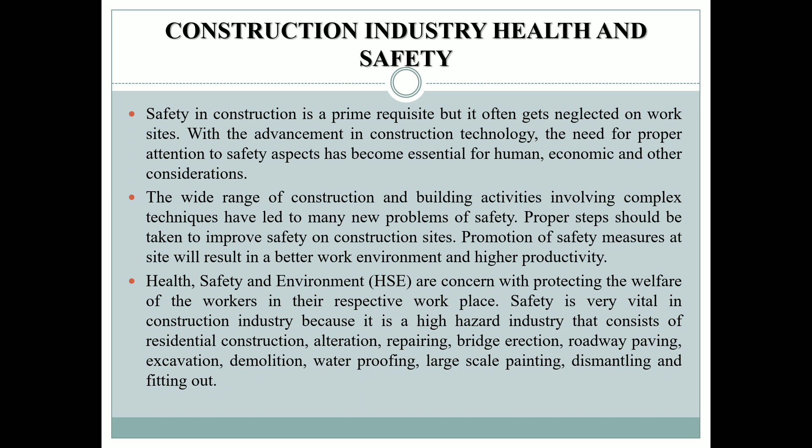Health, safety and environment, that is HSE, are concerned with protecting the welfare of the workers in their respective workplace. Safety is very vital in construction industry because it is a high hazard industry that consists of residential construction, alterations, repairing, bridge erection, roadway paving, excavation, demolition, waterproofing, large scale painting, dismantling and fitting out. So health, safety and environment should also be very important in construction industry.

The main force behind any construction site is the manpower, as usual. Without safety, the risks and hazards at very dangerous places can get people injured, hurt, or even killed. This can cause construction site delays, extra expenditures, and loss of manpower. Health and safety is one of the tools that ensures a company achieves success. They cannot get a good outcome if their employees are getting sick and hurt all the time. So protection against health and safety is the prime right of laborers.

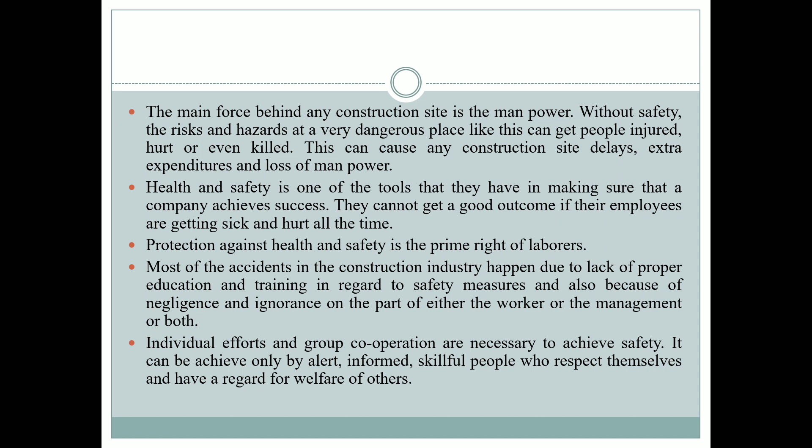Most of the accidents in the construction industry happen due to lack of proper education and training in regard to safety measures, and also because of negligence and ignorance on the part of either the worker or the management or both. Individual efforts and group cooperation are necessary to achieve the safety. It can be achieved only by alert, informed, skillful people who respect themselves and have regard for the welfare of others.

So what are the objectives of safety management? To help increase speed in construction, to increase the standard of living, to reduce the cost of construction, to conserve the available labor force by minimizing idle time, to reduce human suffering.

So, what's actually safety in planning and design? Why is it important? Plan the works to meet the complete requirements. Design the structure considering all the loads and to meet the global requirements or codal requirements and procedure, and use standard materials.

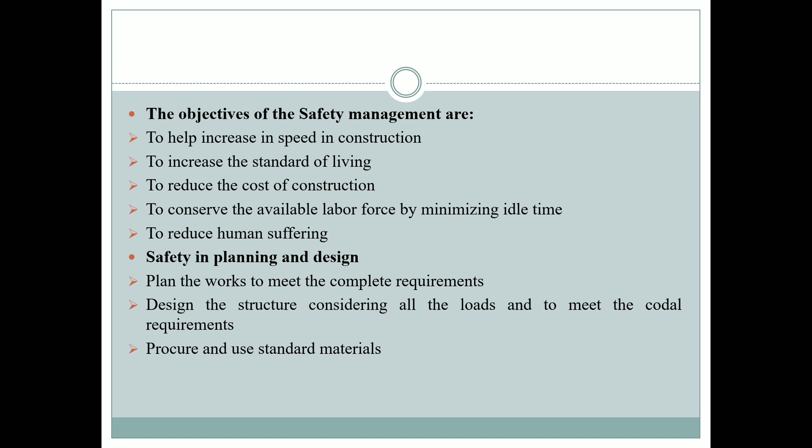So, health and safety issues for construction workers. Which are all the different health and safety issues that workers generally get on the construction site?

First one is pain or injury from overexertion and repetitive manual tasks or working in uncooperative postures, exposure to molds, fungi or rodent droppings, exposure to paints, lead, wood dust and toxic chemical solutions, working in extreme conditions like high temperatures and chemical solutions, working with hand tools, powered tools and heavy machinery equipment, excessive vibration of hands, arms or body from powered tools or equipment, extension of work days, stress or shift hours, and during night working in low light or very poor visibility.

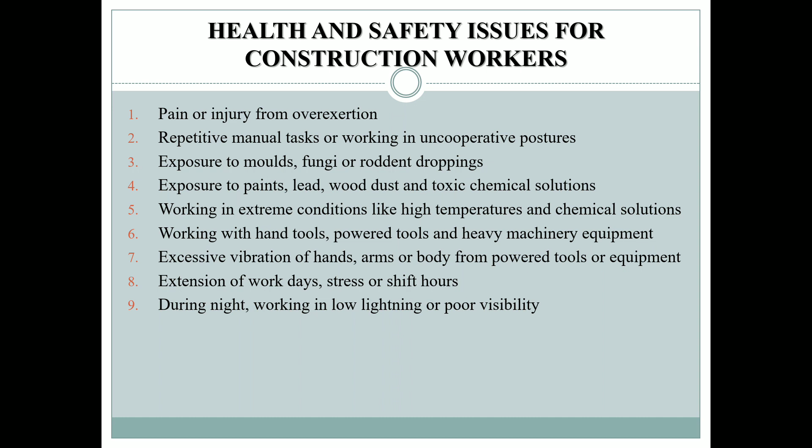These are all the general health and safety issues that a worker on the site will get. So, which are all the safety precautions to prevent accidents? The support provided at the higher levels over which the workers move in connection with the work should be strong and stable.

It comes under scaffolding and all. For workers moving at higher levels, the support should have higher protections to prevent the workers from falling due to slipping. No worker should be allowed to carry or lift any heavy load which can cause serious injury. Before dismantling the building, all unsafe parts should be properly protected to prevent any accidents to the workers. No unskilled person should be engaged on jobs such as operation of heavy equipment like bulldozers and cranes, etc.

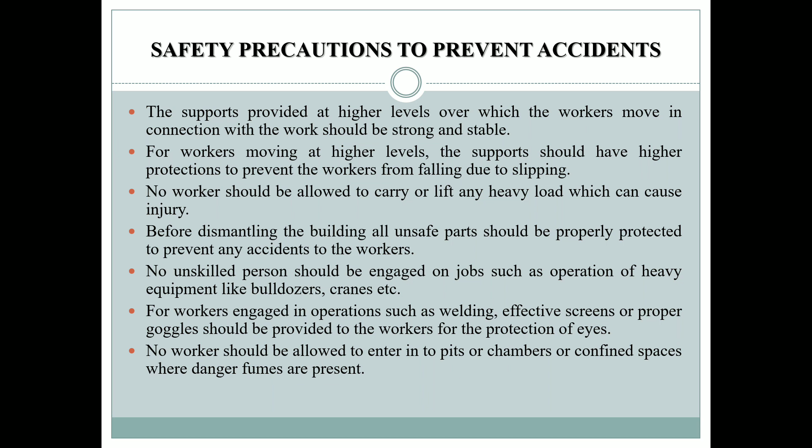For workers engaged in operations such as welding, effective screens or proper goggles should be provided to the workers for the protection of eyes. No worker should be allowed to enter into pits or chambers or confined spaces where dangerous fumes are present. Safety training is provided for all the workers, and disciplinary actions may be taken when the above methods are not effective.

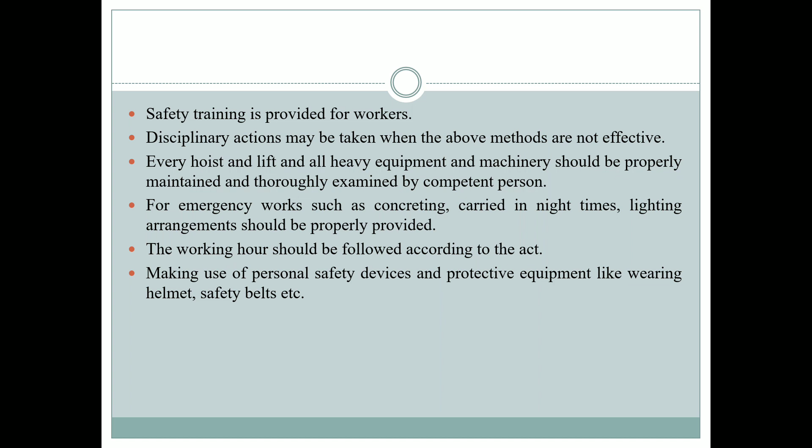Every hoist and lift and all heavy equipment and machinery should be properly maintained and thoroughly examined by a competent person before using it. For emergency work such as concreting carried out at night, lighting arrangements should be properly provided. The working hours should be followed according to the Act. Making use of personal safety devices and protective equipment like wearing helmets, safety belts, etc.

So, how actually is health and safety measures in construction?

First is site layout and planning. A badly planned site is the underlying cause of many accidents, resulting from falls of material and collision between workers and plant or equipment. Space constraints, particularly in urban sites, are always the biggest limiting factors. Proper planning by management is an essential part of preparation and budgeting for the safe and efficient running of a construction operation.

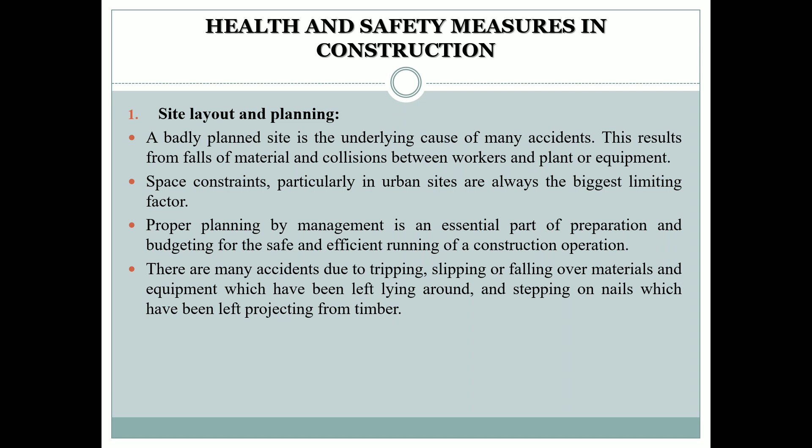There are many accidents due to tripping, slipping, falling over materials and equipment left lying around, and stepping on nails left projecting from timbers. So site layout and planning, and personal protective equipment, PPE, have to be implemented on construction sites.

It refers to protective clothing, helmets, goggles, and other garments or equipment designed to protect the wearer's body from injury by blunt impacts, electrical hazards, heat, chemical infections, etc.

The required PPEs for construction workers include head protection, that is safety helmets; foot protection, that is safety footwear or gumboots; wearing apparel, high visibility clothing, waistcoat, jacket, aprons, etc.; personal fall protection, that is rope grab and fall arrestor; and eye and face protection, goggles, welder's glasses, and hand protection by gloves, finger cots, etc.

Next, respiratory protection like nose masks and ear muffs, etc.

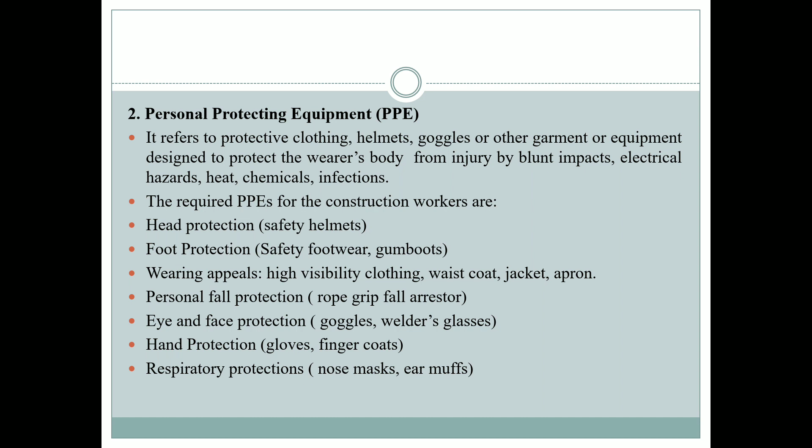The third one is first aid kits and accident reporting. First aid and rescue equipment should always be available on the construction site. On large sites where more than 200 people are employed, there should be a properly equipped first aid room, and at least one person on every shift should be trained in first aid to a nationally recognized standard.

In day-to-day work, an accident register book should be kept at the site to record the accidents that occurred in detail.

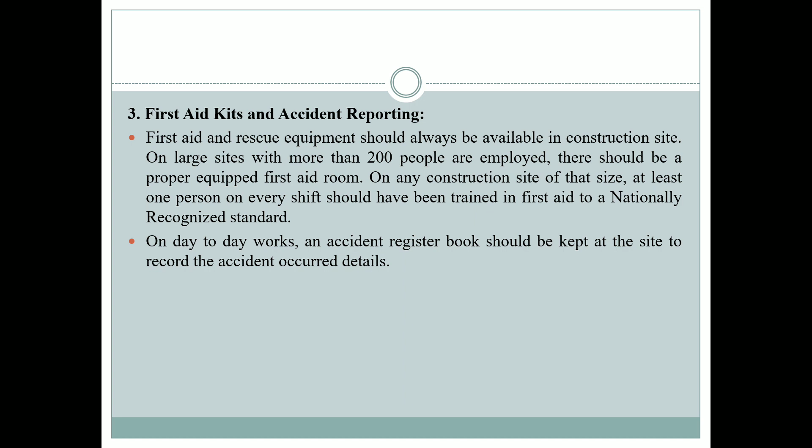The fourth one is health and safety warning signs, that is signboards which have to be included on construction sites. Safety signs and signals are one of the main means of communicating health and safety information. This includes the use of illuminated signs, hand and acoustic signals, spoken communication, and the marking of pipework containing dangerous substances. Traditional signboards such as prohibition and warning signs, fire exit signs, fire action plan notices, firefighting equipment, etc. are to be used on site.

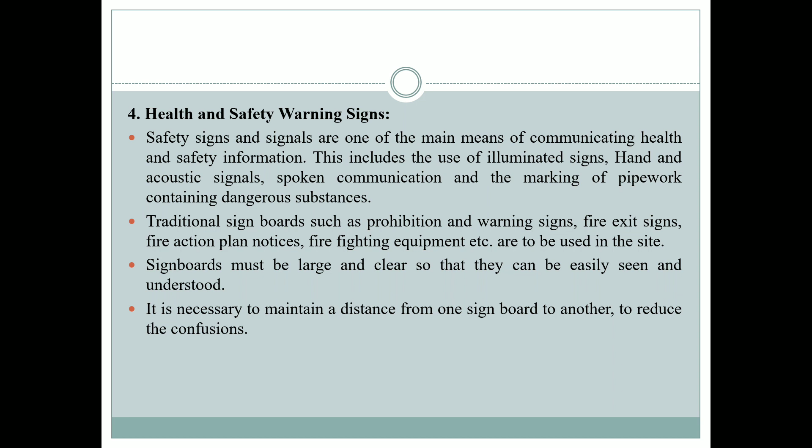Signboards must be large and clear so that they can be easily seen and understood. It is necessary to maintain a proper distance from one signboard to another to avoid confusion.

Next, safety policy. Site managers should have a written safety policy for their enterprise, setting out the safety and health standards which are their objective to achieve. The policy should name the senior executive who is responsible for seeing that the standards are achieved and who has authority to allocate responsibilities to management and supervisors at all levels and to see that they are carried out. So safety policies have to be maintained.

The sixth one is health and safety training on construction sites. With regard to occupational safety and health, training consists of instruction in hazard recognition and its control measures, learning safe work practices and proper use of personal protective equipment, and acquiring knowledge of emergency procedures and preventive actions.

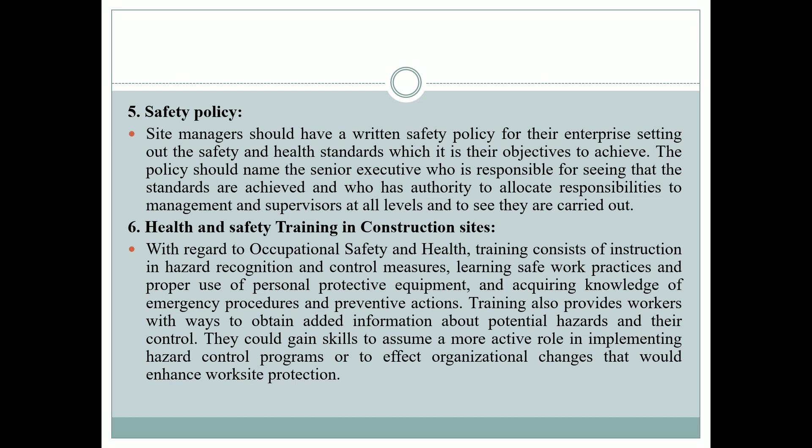Training also provides workers with ways to obtain added information about potential hazards and their control. They could gain skills to assume a more active role in implementing hazard control programs or to effect organizational changes that would enhance worksite protection.

Next is adoption of safety measures for different construction activities. Some of the different construction activities are listed, along with what different precautions are to be taken for the safety and health of the worker on the construction site.

First of all, we'll begin with excavation. In all works, an experienced and competent foreman or supervisor should look after the excavation work. He should have authority to enforce safety rules and prevent the use of defective or unsafe appliances. Before doing excavation work, complete knowledge of underground structures should be essential.

Safety helmets should be worn by persons entering a trench where hazards from falling stones, timbers or other material exist. Whenever workmen have to excavate trenches in soil that is soft or fissured rock or hard soil exceeding 2 meter depth, the trenches should be properly shored and timbered.

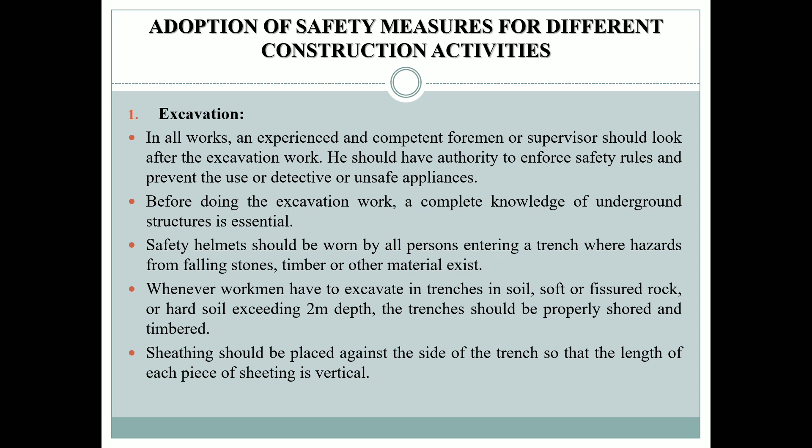Sheathing would be placed against the side of the trench so that the length of each piece of sheeting is vertical.

Excavated material should be kept away from the edge of the trench in order to provide a clear berm, width not less than one-third the final depth of the excavation. However, in special cases where disposal area is limited, the minimum berm width should not be less than 1 meter.

So what are the different precautions to be taken during drilling and blasting? Detonators and other explosives for blasting shall be transported to the site of work in the original containers or in securely locked separate non-metallic containers, and shall not be carried loose or mixed with other materials.

Care should be taken in loading and unloading of explosives. The sealed containers shall not be handled roughly or dropped. Explosives shall be stored only in magazines which are clean, dry, well ventilated, reasonably cool, correctly located, and protected against lightning. Any package containing explosives shall not be dragged, dropped or handled roughly.

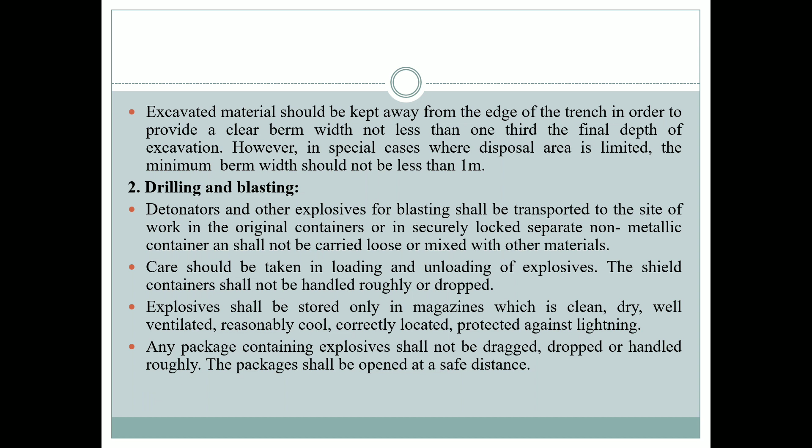The packages shall be opened at a safe distance. Smoking shall not be permitted, it is completely prohibited, nor matches, open lights, fire, flame, or any other devices capable of producing sparks or flames shall be strictly prohibited while handling or using explosives.

Blasting should be carried out only with the permission of the engineer in charge. The blasting operations shall remain in the charge of competent and experienced supervisors and workmen who are thoroughly acquainted with the details of handling explosives and blasting operations. All materials, tools and equipment used for blasting operation must be of approved type.

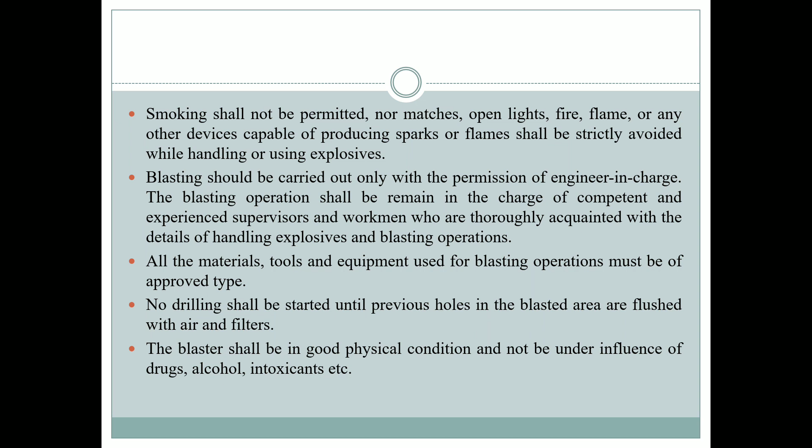No drilling shall be started until previous holes in the blasted area are flushed with air and filters. The blaster shall be in good physical condition and not be under the influence of drugs, alcohol, intoxicants, etc.

While planning drilling operations for blasting purposes, consideration must be given to the nature of the stratum and overburden with a view to avoid the possibility of landslides during blasting. The face of the rock shall be carefully examined before drilling to determine the possible presence of unfired explosives.

The position of all holes to be drilled shall be marked out with white paint. The boreholes shall be carefully checked for length, presence of water, dust, etc.

Surplus explosives shall not be stacked near working areas during loading. Loading and drilling shall not be carried out at the same time in the same area. Metallic devices of any kind shall not be used, and no loose material such as tools or drilling implements shall be left on the rock surfaces to be blasted.

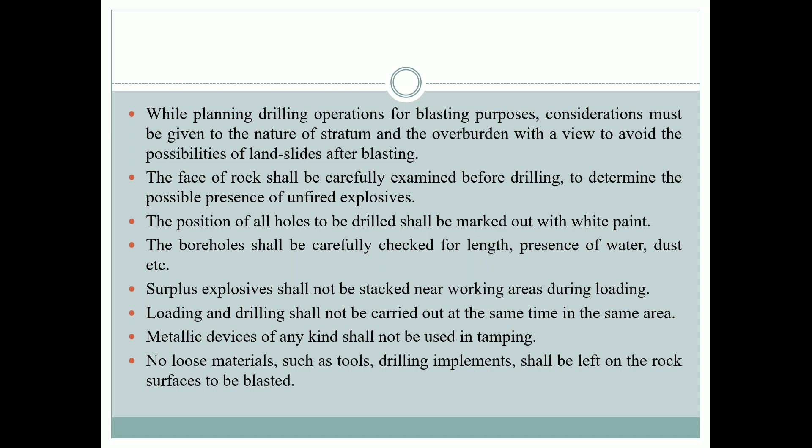The blaster shall not return to the blasting site after firing until at least 5 minutes have elapsed. In case of electric shot firing, the shot holes shall be examined after blasting, and in case of misfire, no person shall be allowed to approach the blasting site for at least a 5 minute gap. So which are the other precautions to be taken during hot bituminous works?

All necessary precautions must be taken to avoid fire. Those working with bitumen and boilers must be trained in the action to take in the event of fire and in first aid treatment and procedure for dealing with bitumen burns.

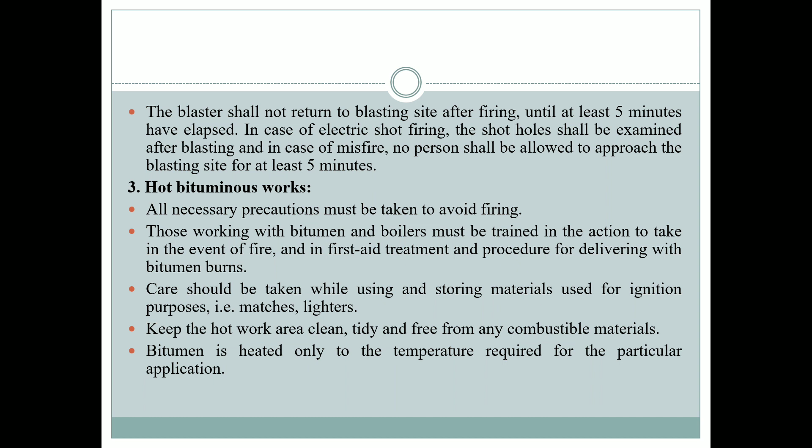Care should be taken while using and storing materials used for ignition purposes, such as matches and lighters. Keep the hot work area clean, tidy and free from any combustible materials. Bitumen is heated only to the temperature required for the particular application.

Hot bitumen should not come in contact with water, and excessive moisture should not be present in the aggregates as it may lead to frothing. In case of frothing, addition of some hygroscopic material or anti-frothing agent may be required.

Suitable protective clothing, goggles, boots and gloves are supplied to and used by operators when handling hot bitumen. Dust is suppressed and reduced to a minimum quantity, and bitumen products and solvents are not spilled on the ground or into ditches or water courses.

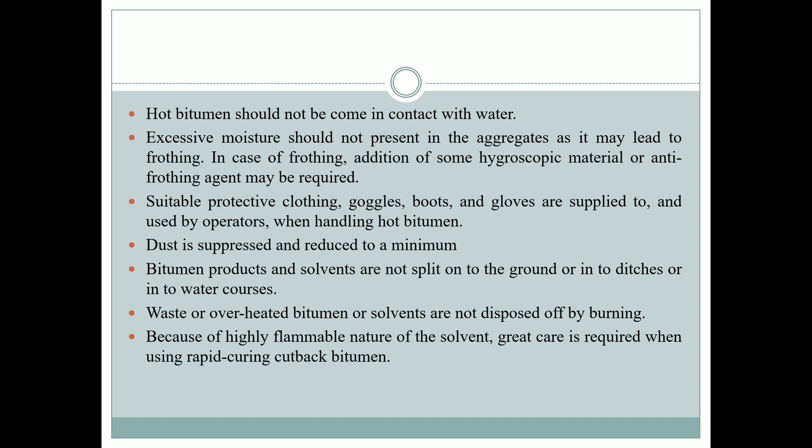Waste or overheated bitumen or solvents are not disposed of by burning. Because of the highly flammable nature of the solvent, great care is required when using rapid curing cutback bitumen.

Next comes scaffolding, ladders, formwork and other equipment — what are the different precautions to be taken? Every scaffold should be securely supported or suspended and properly braced to ensure stability. All scaffolds and working platforms should be securely fastened to the building or structure.

If independent of a building, scaffolds should be braced properly. If scaffolds are to be used to a great extent for long periods of time, a regular plank stairway wide enough to allow two people to pass should be erected with handrails on both sides.

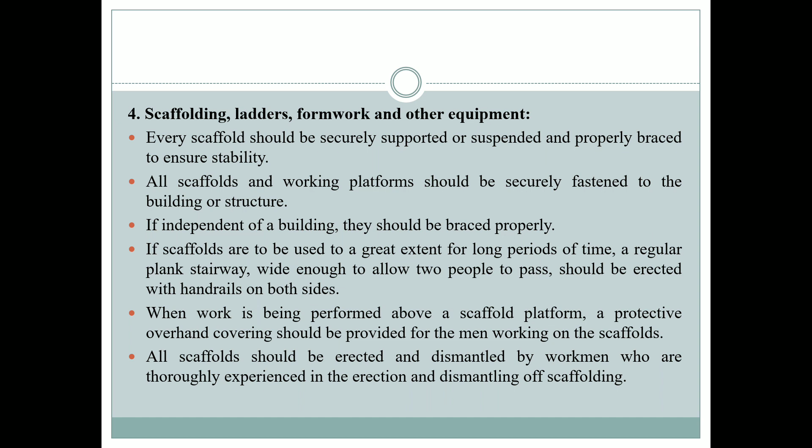When work is being performed above a scaffold platform, a protective overhead covering should be provided for the men working on the scaffolds. All scaffolds should be erected and dismantled by workmen who are thoroughly experienced in the erection and dismantling of scaffolding.

All scaffolds should be inspected by competent personnel at least every 3 days after erection, and the results of inspection should be recorded. Tags must be fitted to all scaffolds to show whether they are safe for use or not. All scaffolds should be constructed of sound materials free from patent defects, and all working platforms shall be fully boarded.

Ladders employed in heavier trades should not exceed 6 meters in length. Care should be taken to ensure that no uninsulated electric wires exist within 3 meters.

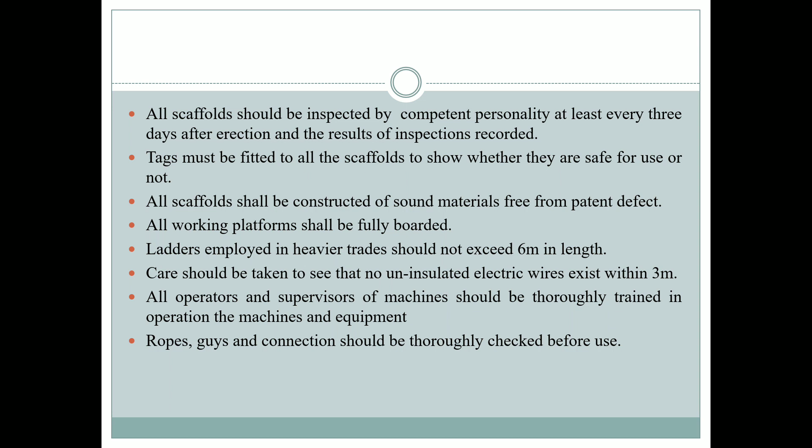In fabrication and erection, all equipment such as gas cutting, weld sets, drills, power hacksaws and grinders should be checked periodically to ensure their safe working.

Moving parts of all equipment should be provided with safeguards. Rubber pipelines for oxygen and acetylene gas should be regularly checked. Workers engaged in gas cutting and welding operations must wear suitable gloves and aprons and use proper welding screens.

Power cables for all equipment should be properly insulated and protected from damage and cuts. Danger signs should be prominently displayed on all poles of overhead electric lines used at site. Cut pieces and scrap should be stored at an appropriate place to avoid accidents.

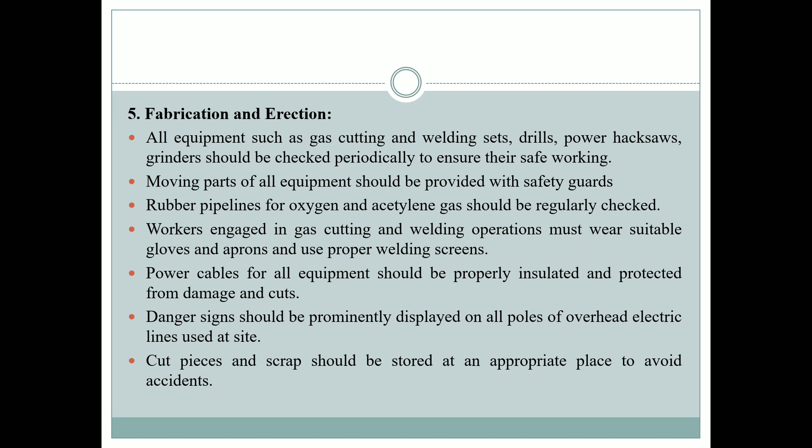All lifting tools and tackles such as wire ropes, U-clamps, shackles, chain pulleys, hooks, etc. should be checked thoroughly before use. All erection equipment such as cranes, derricks, hoists, etc. should be thoroughly checked before use. Workers engaged in erection work should wear helmets and use safety belts to avoid accidents.

What are the different precautions to be taken during the storage of materials? Construction materials should be stored in such a manner as to prevent deterioration, mixing up with foreign matter, and to ensure preservation of their quality.

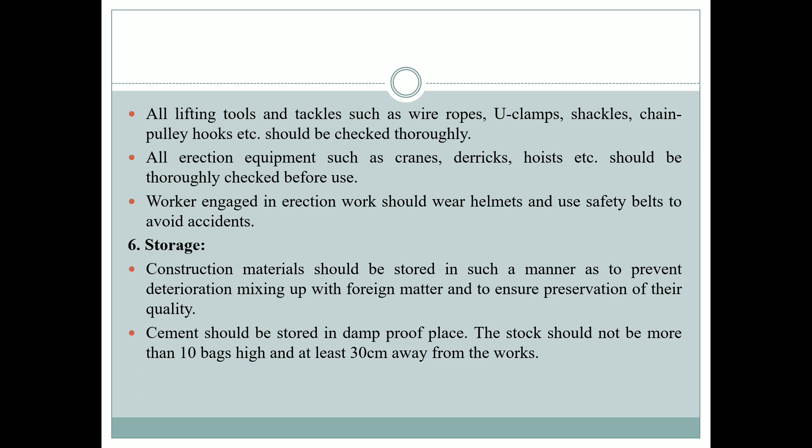When storing cement, it should be stored in a damp proof course or place. The stock should not be more than 10 bags high and at least 30 centimeters away from the work sites.

Bricks shall not be dumped at the site. They should be stacked on level ground to minimize breakage, and the height of stacks should be limited to 1.5 meters.

Timbers including sleepers, runners, scantlings, battens, plywood, etc. should be stored separately in neat stacks. Petroleum products should be stored separately, and smoking and open fires should be strictly prohibited when these products are stored.

Explosives must be stored in proper magazines, and the prescribed safety measures for handling and storing explosives should be observed. Steel reinforcement bars should be stacked section wise.

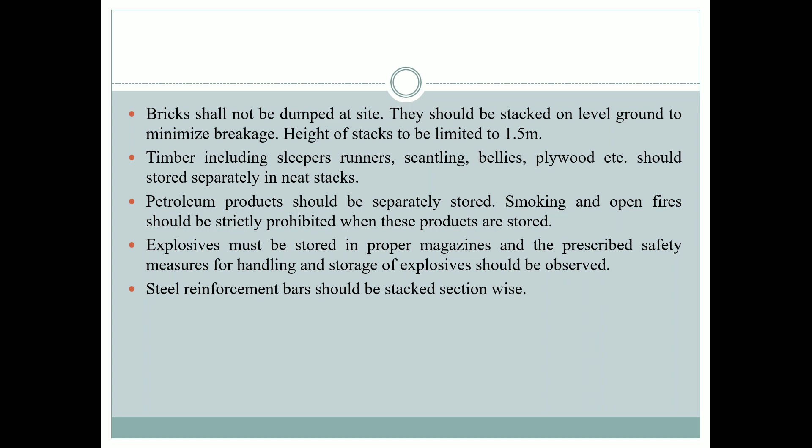Next comes demolition. On every demolition work, danger signs should be provided all around the structure and doors giving access to the structure. During night time, lights should be placed around the barricades and entry of unauthorized persons is completely restricted. At the time of demolition work, workers should use all safety appliances such as helmets, goggles, gloves, etc.

In case danger is anticipated to adjoining structures during the process of demolition, the same should be got vacated to avoid any danger to human life. The process of demolition may weaken the side walls of an adjoining structure, and to prevent possible damage, these walls should be supported until permanent protection is provided.

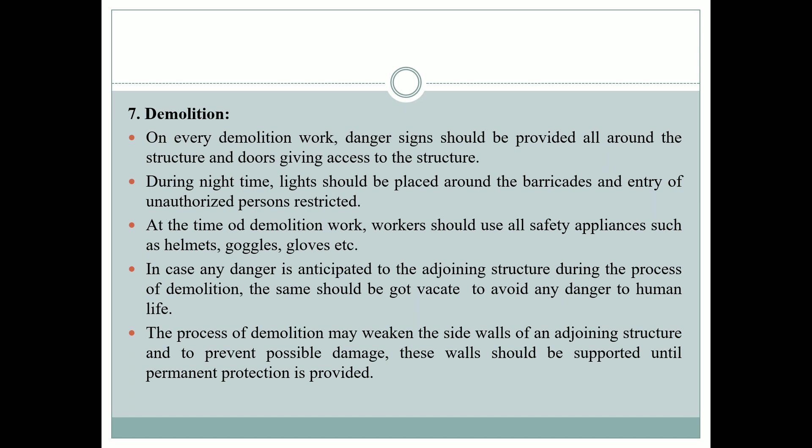The power on all electrical service lines must be shut off and all such lines disconnected before demolition work is started. All gas, water, steam and other service lines must be shut off before the demolition work is started.

If a structure to be demolished has been partly wrecked by fire or explosion, walls and damaged roofs should be braced suitably before going for demolition. No demolition work should be carried out at night, especially when the structure to be demolished is in an inhabited area.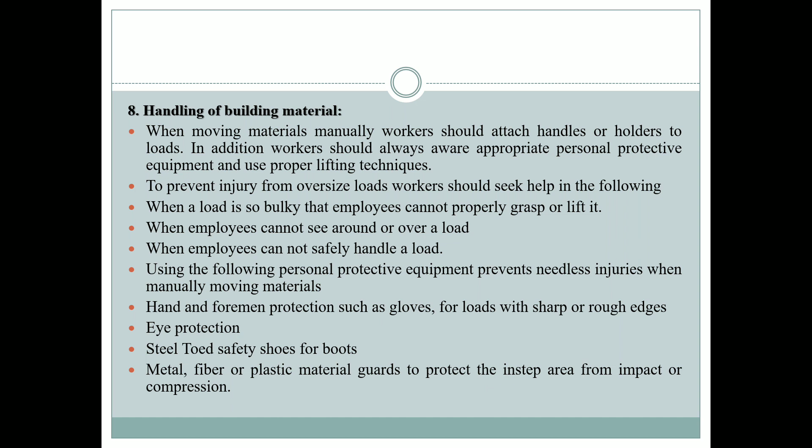Next, what is a safety campaign now? With the increase in the number of accidents in the construction industry, it has become essential to educate people with regard to safety measures. It is the duty of management to provide a safe working environment to workers at construction sites.

Unsafe practices must not be tolerated at any cost, and proper safeguards must be provided at all times. One way of making people aware of safety measures is to launch safety campaigns, in addition to providing preventive measures at the work site. Frequent exchange of ideas between labor and management would help in minimizing accident rates. A continuing education program using posters, booklets, films, lectures, and discussions, with emphasis on supervisory safety training, will prove effective in reducing the accident rate.

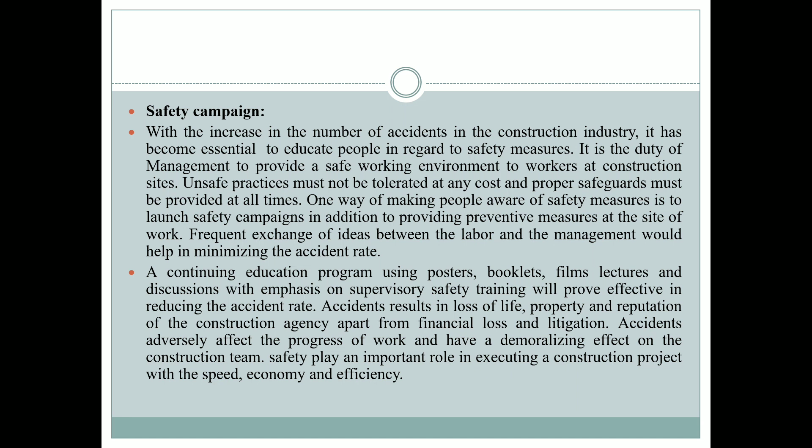Accidents result in loss of life, property, and reputation of the construction agency, apart from financial loss and litigation. So accidents adversely affect the progress of work and have a demoralizing effect on the construction team. Safety plays an important role in executing a construction project with speed, economy, and efficiency.

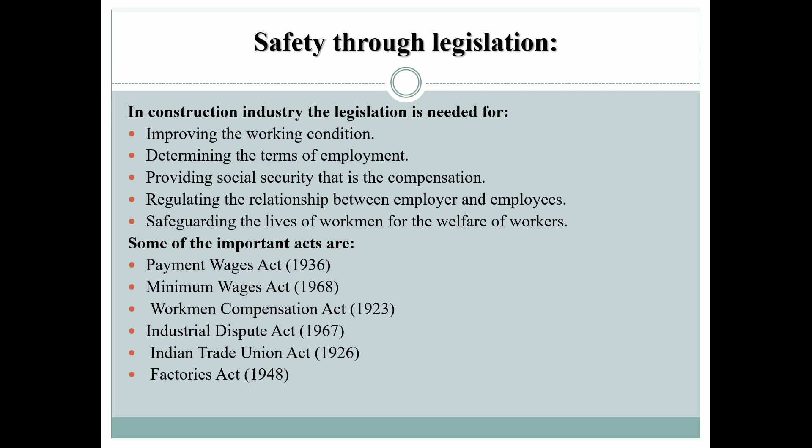Next, which are the different acts that focus on safety purposes? Safety through legislation. In the construction industry, legislation is needed for improving the working conditions, determining the terms of employment, providing social security (that is, compensation), regulating the relationship between employees and employers, and safeguarding the lives of workmen for the welfare of workers. Some of the important acts are the Payment of Wages Act, Minimum Wages Act, Workmen Compensation Act, Industrial Disputes Act, Indian Trade Union Act, and Factories Act, all of which belong to safety purposes that have to be followed in the construction site for the betterment of workers.

So we'll go for the Workmen Compensation Act. This act covers all persons employed in construction, maintenance, repairs, or demolition of any building, dams, roads, bridges, tunnel works, plastering operations, etc. The salient features are: the act defines partial and total disablement and fatal accidents while on duty. It sets a schedule of compensation to be paid for various injuries.

The act protects workers against injuries arising out of and in the course of employment, but no compensation is payable in respect of an injury which does not result in partial or total disability, and for non-fatal injury caused by the worker under the influence of alcohol.

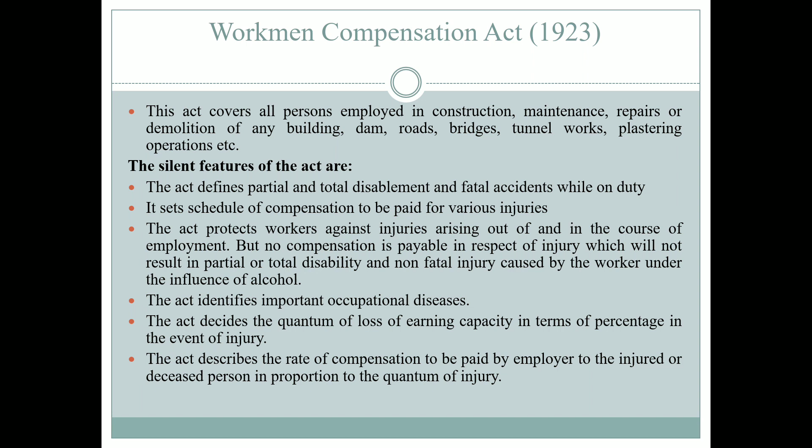The Act identifies important occupational diseases. The Act decides the quantum of loss of earning capacity in terms of percentage in the event of injury. The Act describes the rate of compensation to be paid by the employer to the injured or deceased person in proportion to the quantum of injury.

The Act provides for the appointment of a Commission for Workmen's Compensation, whose functions are settlement of disputed claims, disposal of claims in fatal cases, and revision of periodical payments. It is liable on the employer to pay compensation to workers as per the provisions of the Act, failing which he will be punishable under the law.

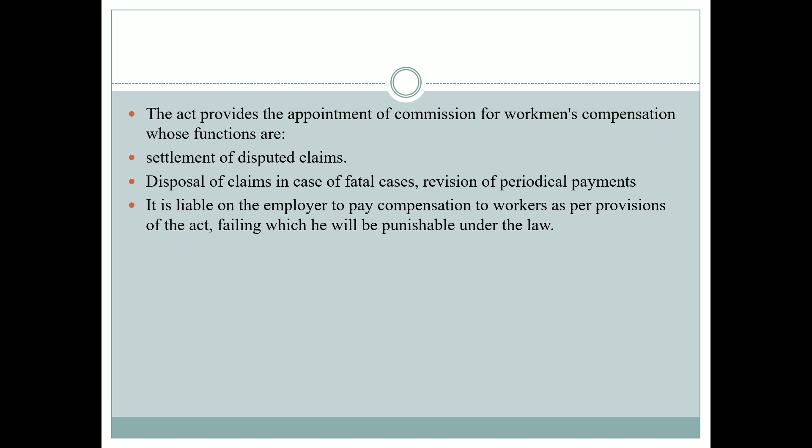Next, the Indian Factories Act, 1948. The Factories Act 1948 contains provisions in respect of health of workers, safety, welfare of labor, working hours, and leave with wages concerning workers employed in factories. In this act, it is defined as applying to establishments where 10 or more workers are engaged for over 12 months in the manufacture of a product with the use of power. This factor does not hold good for civil construction unless a rule is made making the Factories Act applicable to the construction industry.

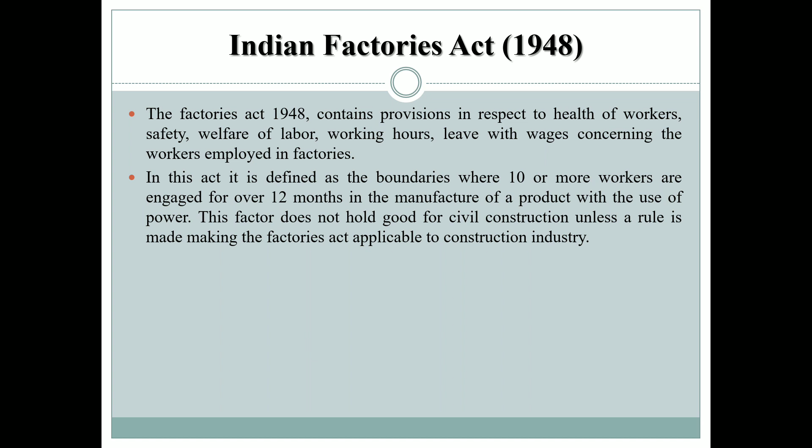And the third one is the Indian Trade Union Act, 1926. A trade union means any association of persons, temporarily or permanently formed, primarily for the purpose of regulating the relations between workmen and employers, or between workmen and workmen, or between employers and employers, or for imposing restrictive conditions on the conduct of any trade or business.

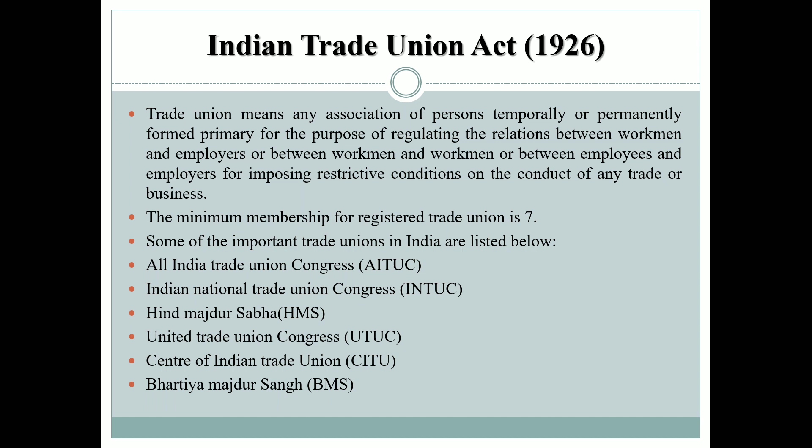The minimum membership for a registered trade union is 7, and some important trade unions in India are: All India Trade Union Congress, Indian National Trade Union Congress, Hind Mazdoor Sabha, United Trade Union Congress, Centre of Indian Trade Unions, and Bharatiya Mazdoor Sangh.

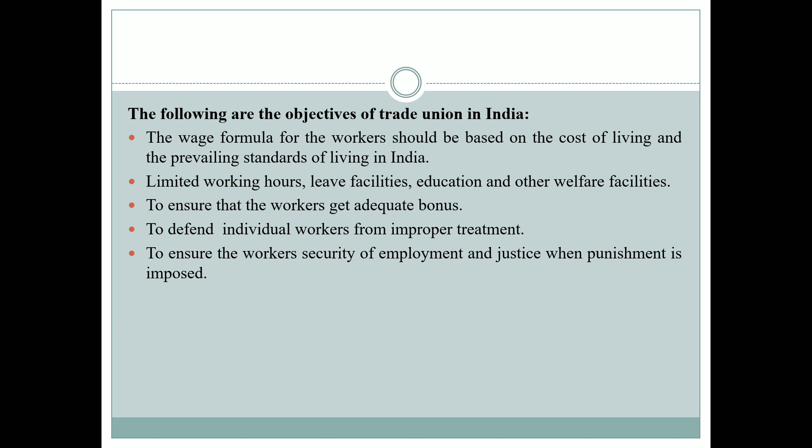And which are the following objectives of the trade union? The wage formula for workers should be based on the cost of living and the prevailing standards of living in India, limited working hours, leave facilities, education and other welfare facilities, to ensure that workers get adequate bonus, to defend individual workers from improper treatment, and to ensure workers' security of employment and justice when punishment is imposed.